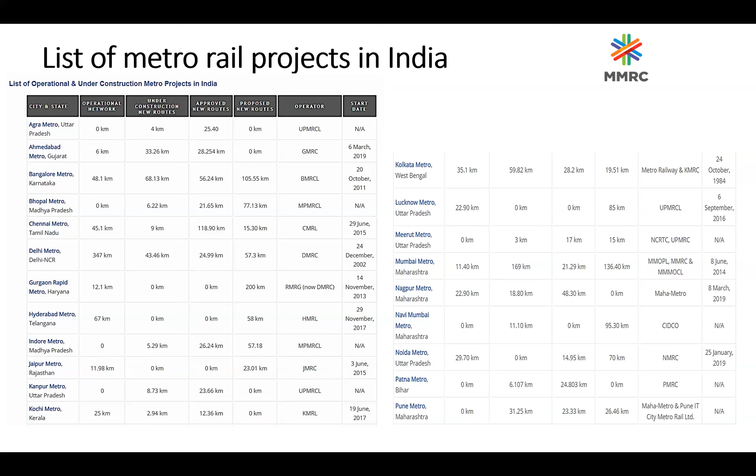These are some of the other projects that are in pipeline: Gorakhpur, Surat. In fact, the Surat Metro, the Prime Minister is inaugurating today, laying the foundation stone. Other projects that may come up, may not come up, in what time frame they come up, but they are also on the horizon as the country is progressing.

If we see global comparisons, London has got a 400-kilometer underground network, 11 corridors, 270 stations. London Overground has 167 kilometers.

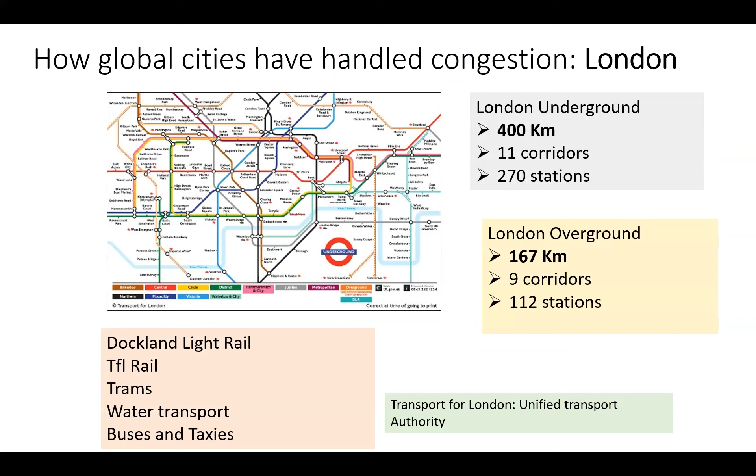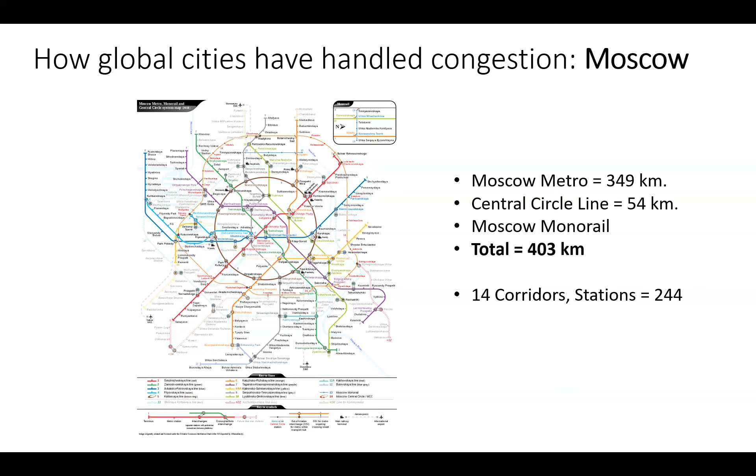We see Moscow, 403 kilometers, 244 stations. Singapore, about 200 kilometers, 119 stations. This statistics could be a little old, maybe 2-3 years old.

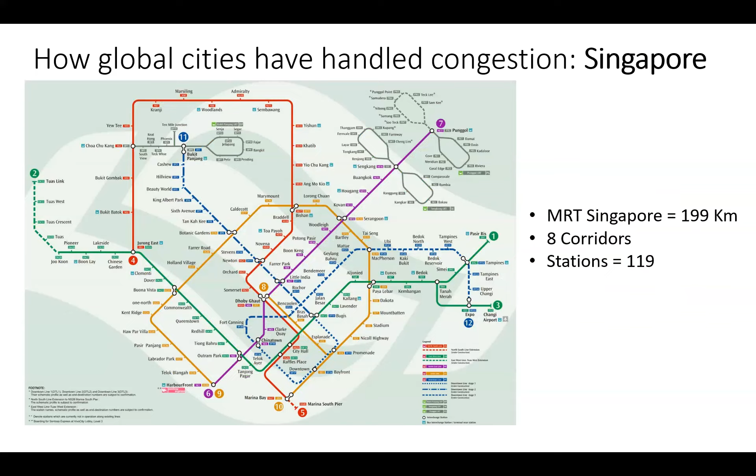And then we come to Mumbai. The Mumbai latest master plan is actually for 337 kilometers, 14 lines to be completed by 2026 with an investment of 1,40,840 crore. That's the government statistics.

Some facts about Mumbai: it's the 6th largest city in the world. It's the financial capital of India. It contributes a substantial share in India's GDP. It collects 1/3 of India's tax revenue. The ports handle 1/3 of the country's foreign trade. It handles 38% of international and 28% of domestic air traffic.

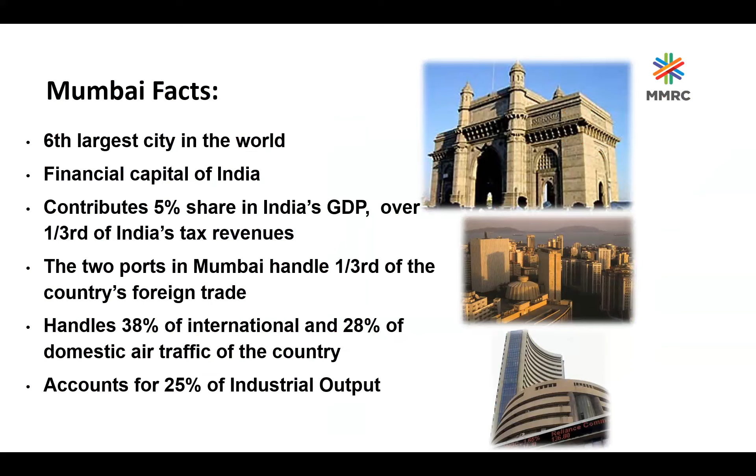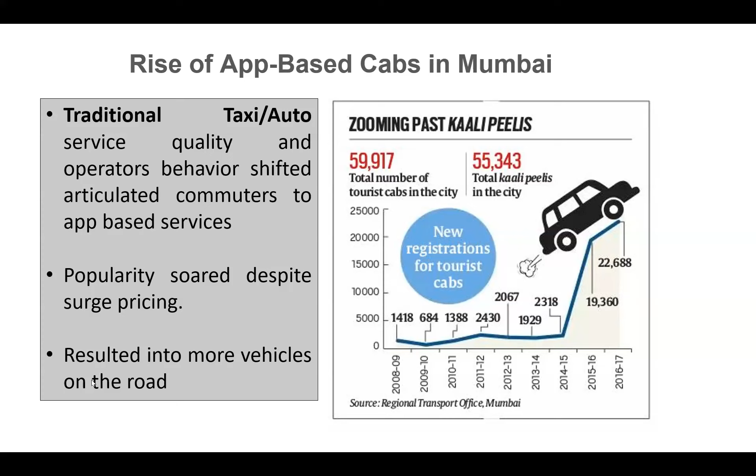That's Mumbai's suburban infrastructure. In Mumbai, huge traffic is actually carried by railway, which is now being supplemented by creating this metro network.

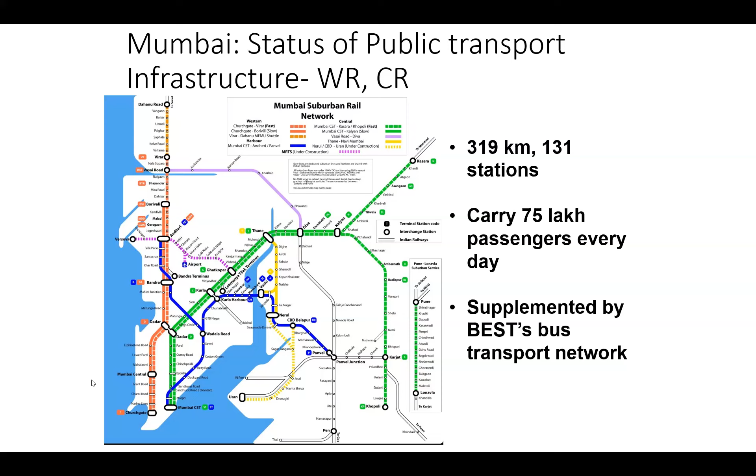Our project is 33.5 kilometers fully underground, it has got 27 stations. It cost 23,000 odd crore at the sanction level. The project cost has increased, and revised costs are under approvals.

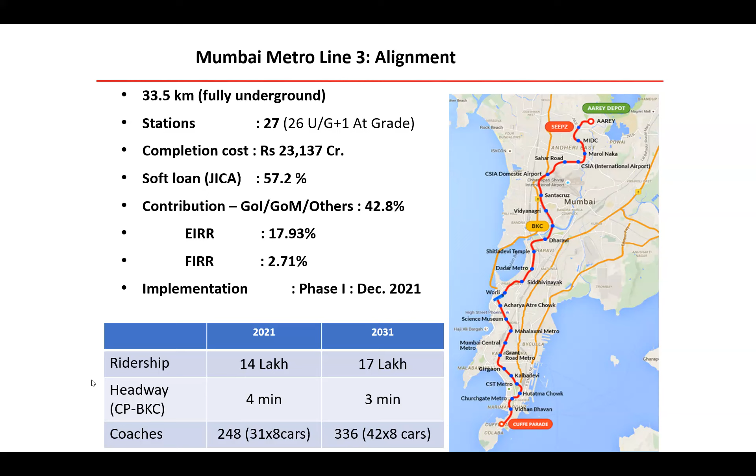Some statistics as to which area we are connecting: we are connecting the business district, public transport hubs, both airport terminals, connecting origination and destination points, educational institutes, hospitals, religious places. 30 lakh people in Mumbai are in the influence zone of this project.

The trains would have 8-car capacity and will cater to 72,000 PHPDT. On rolling stock: fully air-conditioned stations, platform screen doors, CBTC, unmanned train operation. So any unmanned network in India or abroad, we are matching with that.

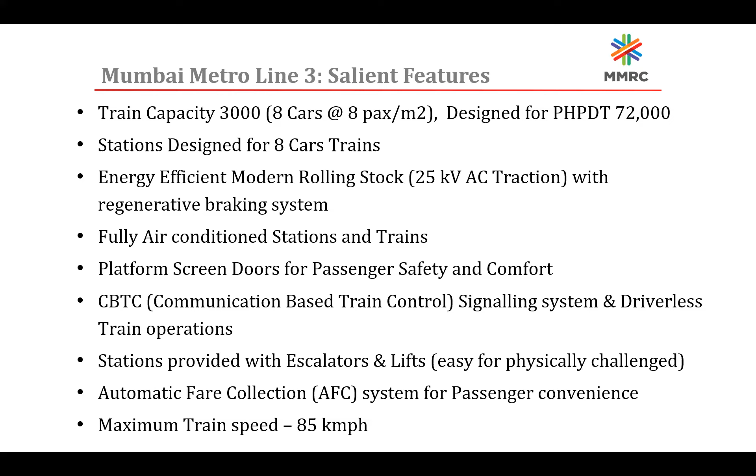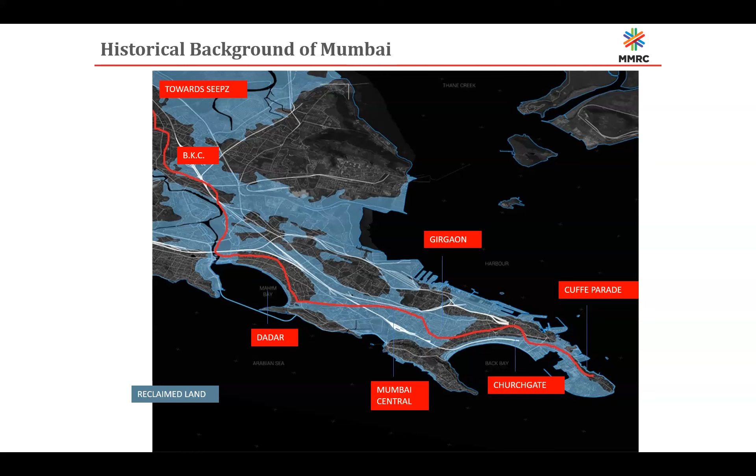Mumbai was 7 islands, and these 7 islands, over the period of time, were joined by reclamation. So the blue part that you see is the reclaimed part, and that's how our line is set up in the topography of Mumbai—somewhere very close to sea, somewhere in the reclaimed area, somewhere crossing a water body. There are challenges.

The corridor passes through densely populated and congested areas. It's practically impossible not to have tunnels passing directly underneath or in close proximity of existing buildings and infrastructure. We are in close proximity of heritage buildings, high-rise buildings, dilapidated buildings, congested areas with narrow roads, flyovers, metro viaducts, and railway lines.

What is important is that each of these challenges is analyzed and designed through modeling and calculation to ensure they are technically dealt with. This is where the professionals in the field of design come in, to model the situation, analyze it, and give data and limits which the site engineers would take into account while executing the work.

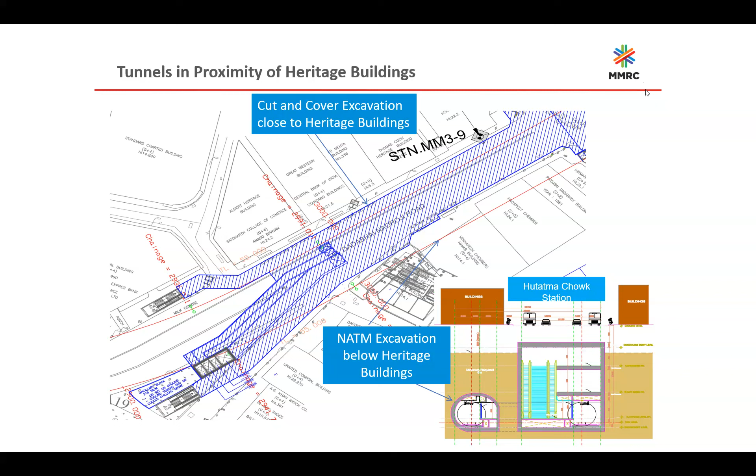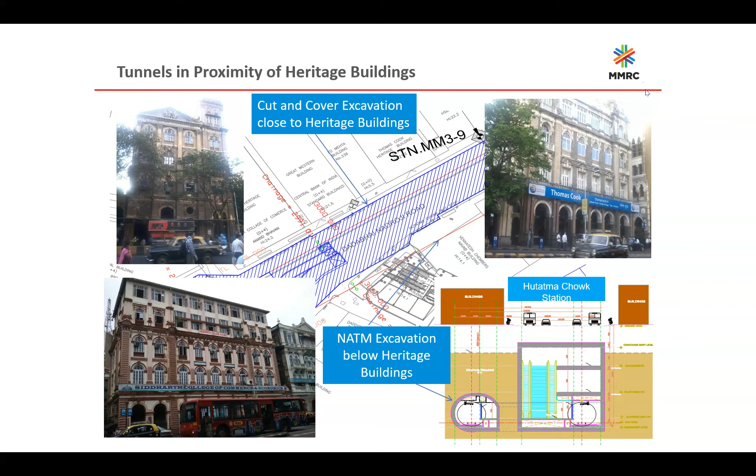Now, some typical examples: if you see the cross section of Hutatma Chowk station, we have one platform created by mining, by NATM, and one platform in a cut and cover box. There are buildings above, and these are heritage buildings. These are the type of buildings within which this project is situated.

Another station, Vidhan Bhavan station. The high-rise buildings are very close by. We also have an old area, Kalbadevi.

Let me fix some technical issues if it is from my end. Hello, am I audible? Yes, yes, you are audible, sir. You are audible, and that disturbance is very little, minor. You can continue, sir.

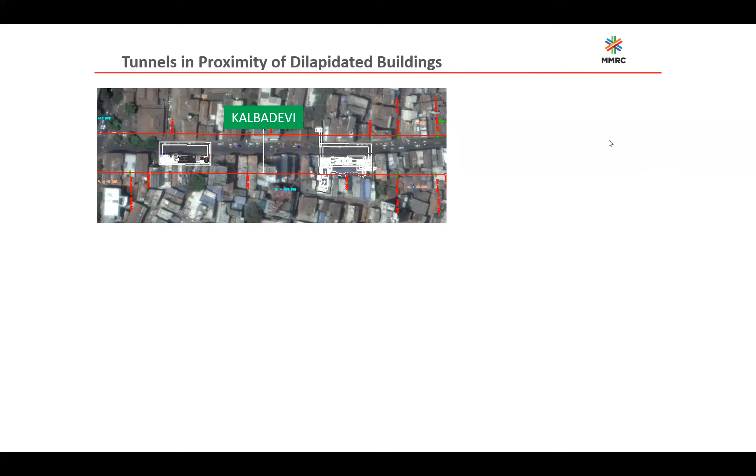This is Kalbadevi station. If you see the Google image, there are a lot of old buildings, and the white lines show the station, how it is seated in the midst of old dilapidated buildings on both sides of a narrow, 10-meter wide road. We are creating a station there, and we have already done the tunneling beneath these buildings.

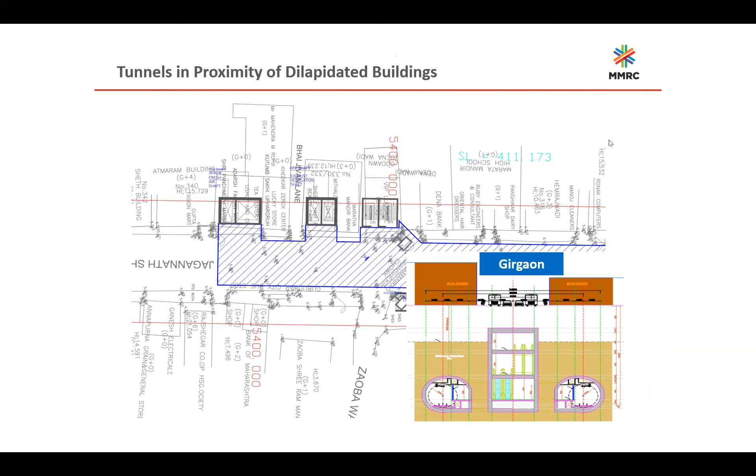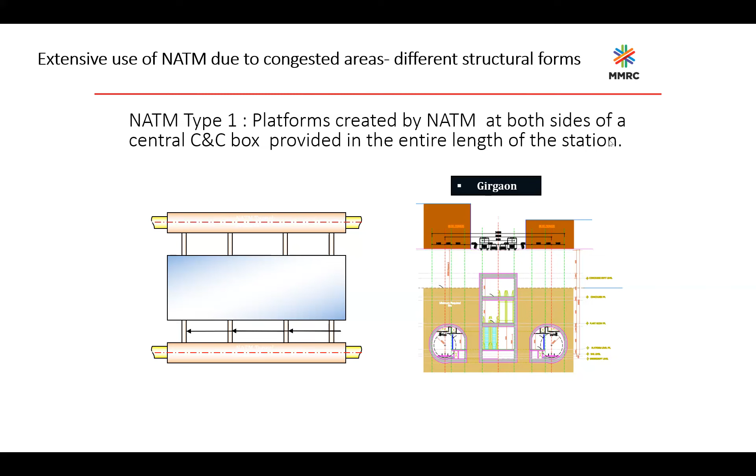Another station next to Kalbadevi station is Girgaon. Both platforms are below the buildings and being created by NATM technology. These are the buildings in that area. In all, 7 stations are done with cut and cover and NATM technology.

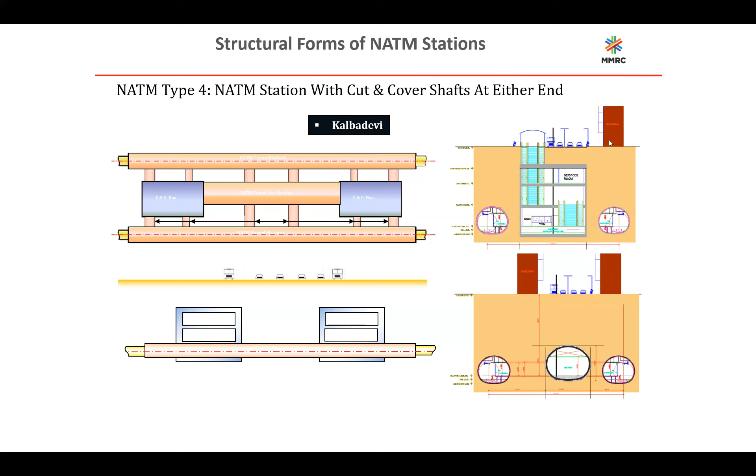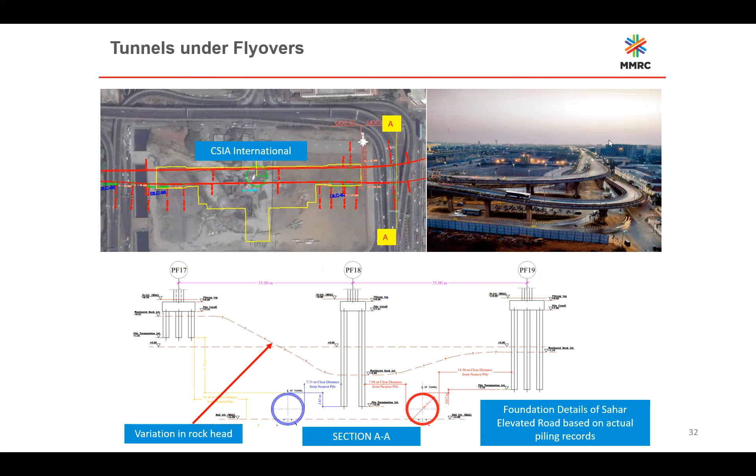In Kalbadevi station, in fact, the central cavern is also a tunnel. Then we are below flyovers, so you can see the foundation of the flyover, and we are on either side of it. Below buildings, we are directly beneath the foundations of high-rise buildings. This is Marol station, where the station is on either side of a metro viaduct. We are also crossing a railway line.

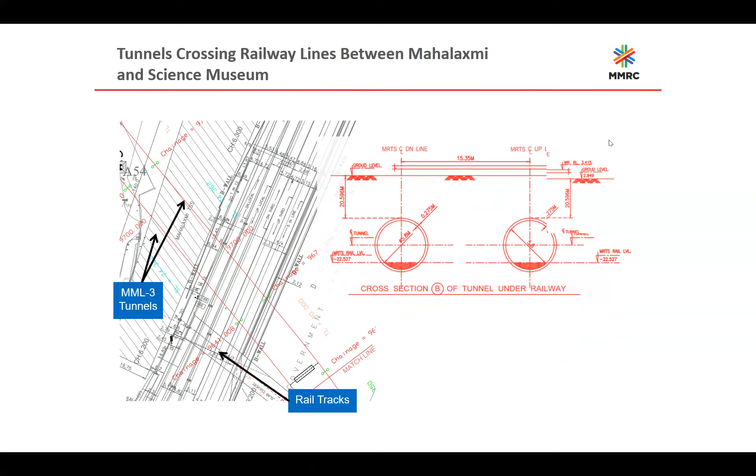So these are the challenges faced by the project, which ultimately come to the designers. While field engineers deal with these challenges, finally the designers have to model and design their structures. They have to give study solutions and study construction techniques.

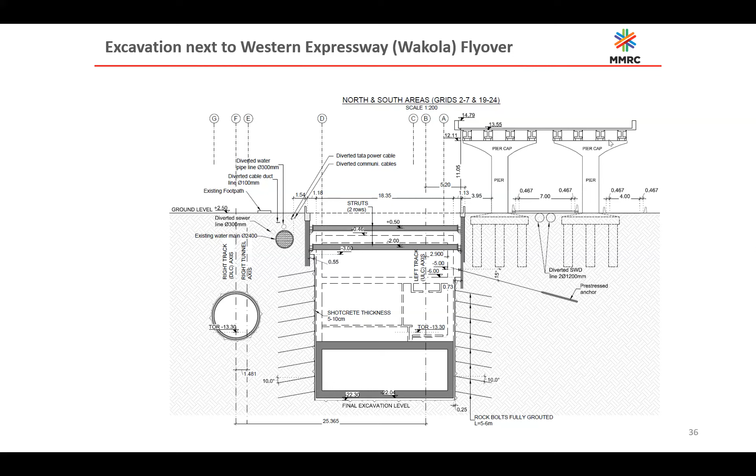Now, coming to the technology used in our project, I would say three types. One is the tunnel boring machine. Here the tunnel boring machine does the tunneling.

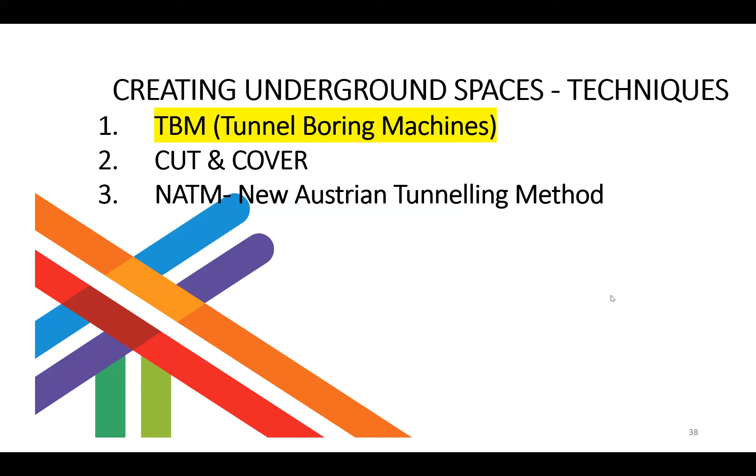Sir, your voice is missing for a while, just for the half minute, from the last half minute. Is it okay now? Yes, it is okay. It's okay, sir.

Okay, so I was explaining principles of the tunnel boring machine. It's one of the major components of the project, and in any urban tunneling, tunnel boring machines play a vital role. We are doing something like 55 kilometers of tunnel by tunnel boring machines in Mumbai.

Primarily, four bullet points: one is the design part, the survey part. Second is the physical part of launching the shaft. Third is the mechanical part, which is the tunnel boring machine itself. And the fourth is the segments and track - the segments that we erect to create the support system.

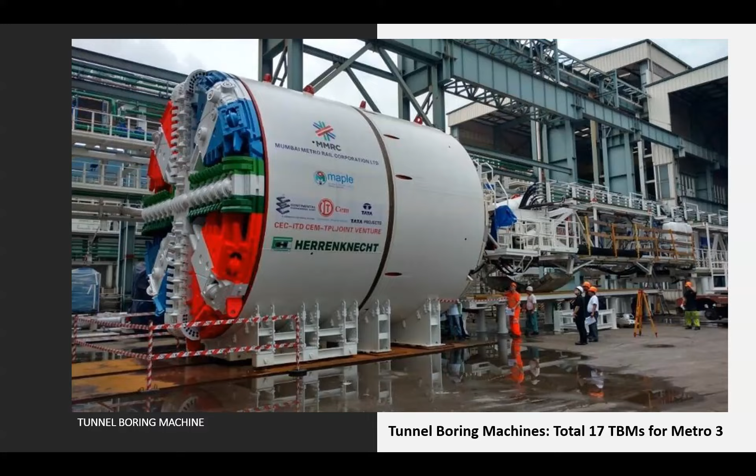This is typically a tunnel boring machine, and I can show you a model of it actually. Can you see the model? Yes, sir, we can see. So a tunnel boring machine primarily has a cutter in the front.

In a confined area, it goes a confined length of about 10-12 meters, within which all major operations take place. In this portion, the ground remains supported and the segments are erected within this area. Before the shield moves out, these segments are grouted at the tail end. So the unsupported part of the ground is there for a very limited time.

As I was asked, how do we deal with the basalt rock in the tunneling? Extensive geotech survey is done in the beginning. We have 7 contracts dealing with tunnel boring machines. Geology in all 7 contract packages, while being in basalt range, varies a bit here and there. There are weak pockets, there are very strong pockets.

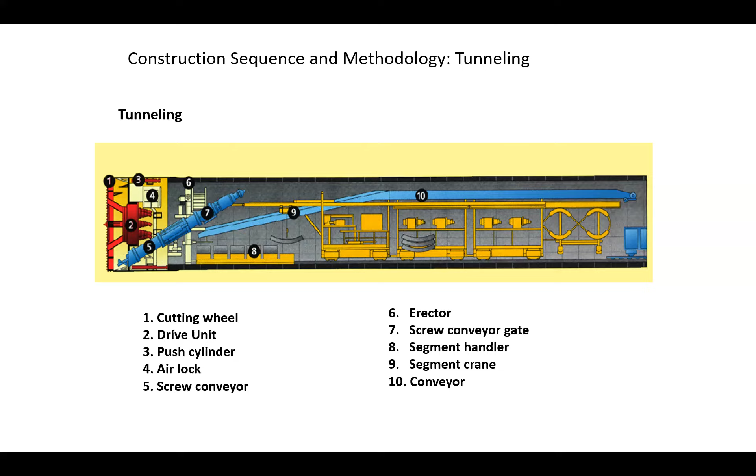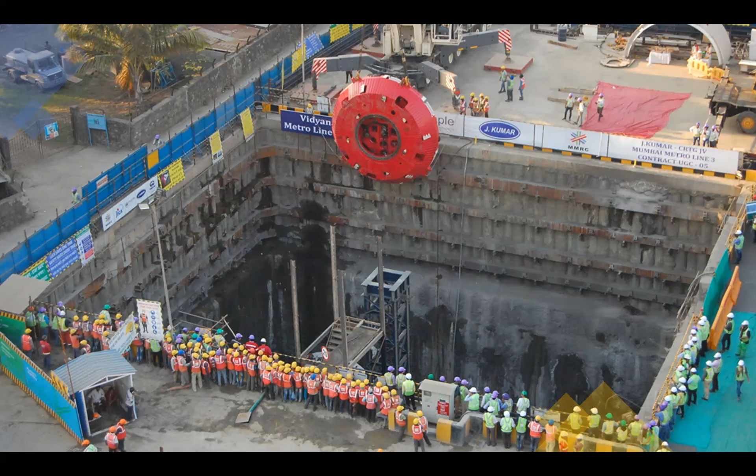This is the second element of shaft. These are vertical cuts from where the machine is lowered into the belly of the ground, and then it starts moving horizontal, or on its alignment. A shaft could be rectangular. If it is at the end of a station, it could be circular, depending upon the topography of a certain area.

The machine is assembled in pieces because it's heavy, around 700 ton in total. Even the cutter head, the piece being lowered at this moment, is about 90 to 100 ton. The machine in total, including all its attachment gantries, is about 100 odd meters long.

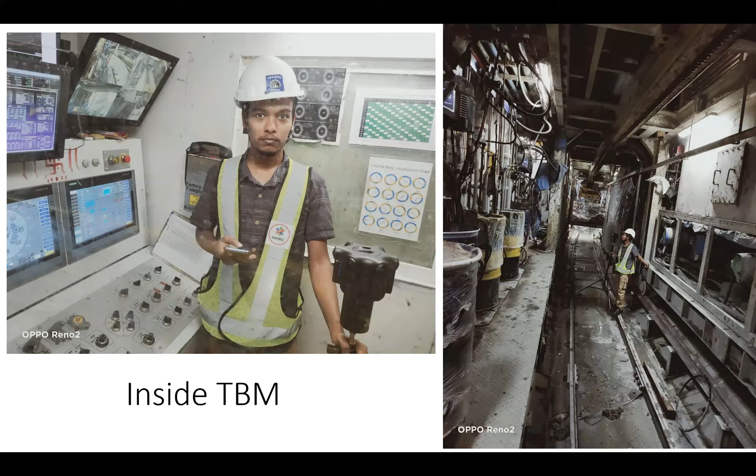There is a control room from where all horizontal, vertical, lateral movements are controlled. The machine is controlled from this control room. A typical metro network would have 2 tunnels running parallel and a station in between.

To start with, when the machine is given a bulkhead or a stay from where it takes reaction. Once it is in ground, it takes reaction from the segments which are already erected.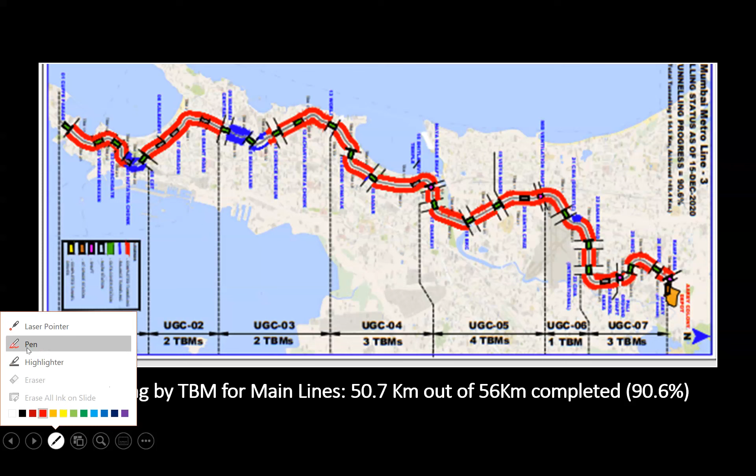That's the Mumbai project. We have done 90% of the tunneling, and all these red marks that you see are the portions that we have completed. Some small portions are pending, basically in this area. Let me show you - some portion over here which is pending, some small portion here, or some portion over here, some bits and pieces.

Now another technology that we have used is cut and cover. Looks simple, but when you do that a meter away from buildings, and old heritage buildings at that, it becomes complicated. Most important is how to control settlement, how to control loss of ground, how to ensure that there is no movement in the ground and no movement in the building.

Those buildings need to be analyzed to see to what extent they can be subjected to some movements, and then we set up monitoring systems, control systems, and alarm systems so that we always remain safe. People are living in those buildings.

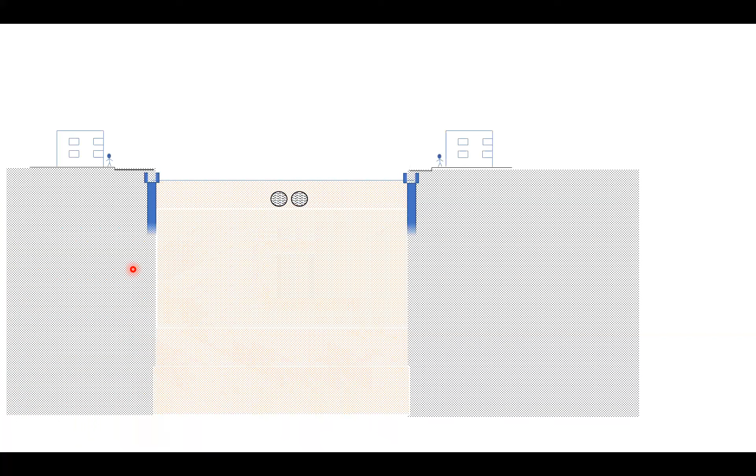On execution level, there would be a perimeter wall. We are doing secant piles. In Delhi, they normally do diaphragm wall. There are utilities, so you can see utilities. We have to deal with utilities also.

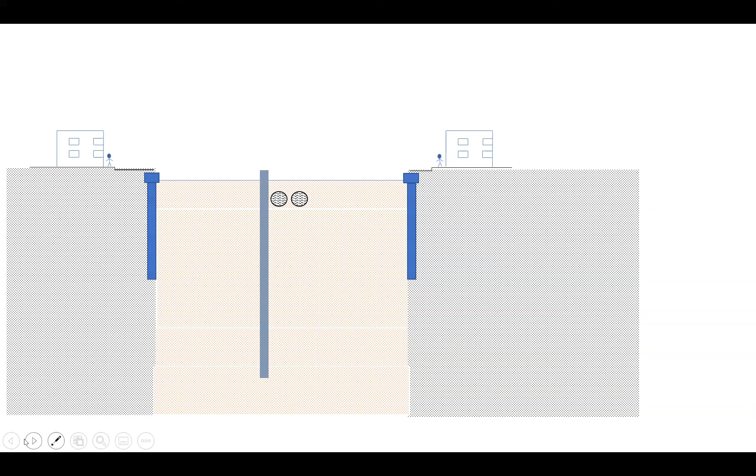Then there could be a plunge column or intermediate support. We have to take care of traffic, so there could be a traffic deck. In most of the area, we had to bring the traffic back on the top. These are all steel structures, so partly the space is given to traffic, partly space is occupied for our own construction related activities.

And then we keep moving down, excavating in soil or rock. The top part is soil, 4, 5, 6, 7 meters. Below is rock. And we keep putting struts to ensure that there is very small movement in the ground outside. If this ground remains unaffected by excavation over here, these buildings are safe.

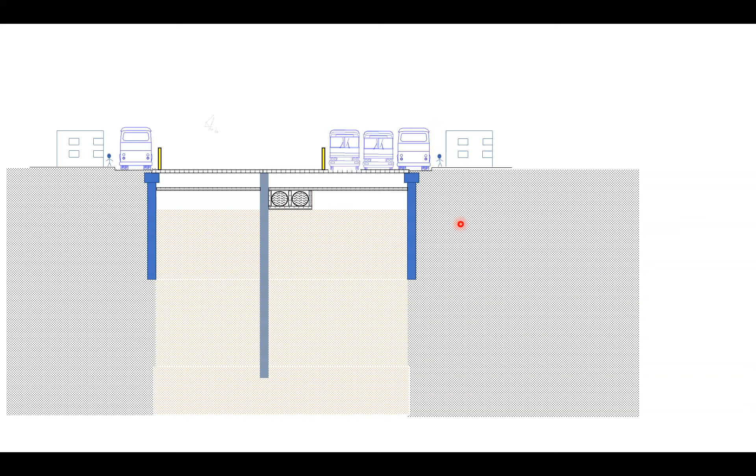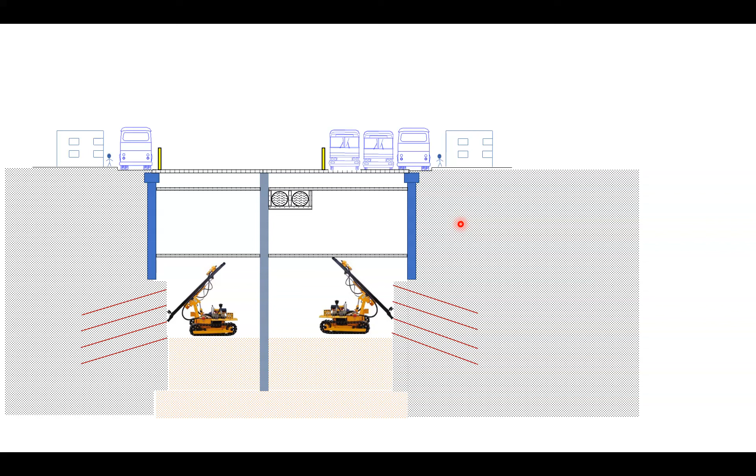So different stages of construction, we keep moving down, and somewhere we move into the rock area, then it becomes unsupported. Once we are in rock, we have to ensure integrity of the rock. Maybe we have to do a lot of rock anchoring, shotcreting.

We have to ensure preventing ground loss, which is a very primary requirement. Controlling vibration also becomes important. In creating this space, rock excavation, if we are using blasting, that vibration can create problem for these buildings. So controlling that vibration during blasting to such extent that these buildings, some of which are heritage, some of which are weak, remain safe.

So we employ those experts, agencies who design blasting. And finally, we build the station.

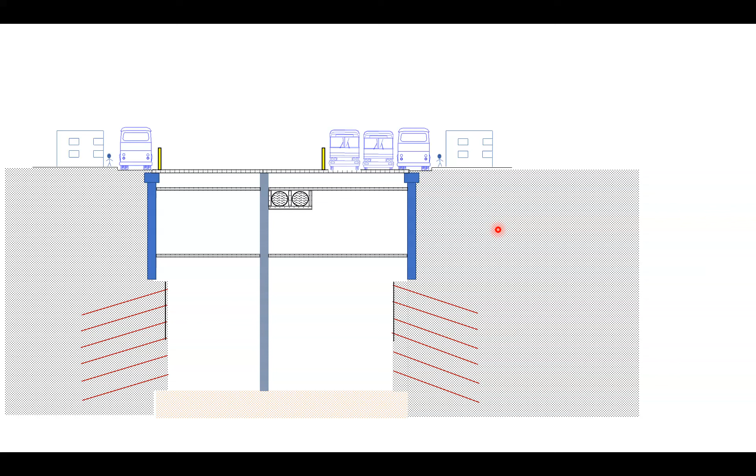In fact, in underground construction, because of the uncertainties, it is the temporary works which I feel is the most critical and which warrants a very high level of professionalism from the designer. They have to anticipate so many situations in their understanding for which there is no direct data.

A building per se, this building comes in the last, which can be constructed base slab first, then wall, then a slab over here, then wall, and then a slab here. This is a relatively simpler work.

The most difficult work is the temporary works. To divert utility, to create space for yourself, to create space for traffic, create this peripheral confinement, and to hold this temporary works in such a way that buildings are not put to risk.

And that's why the secant pile design philosophy becomes very important. I'm not a designer, but these are common sense points which I can flag. The detailed designing would be known to designer and professional designers.

Secant piles are provided to hold excavated face. The stresses in secant piles are primarily determined by the bending moment. Axial forces are negligible. Bending moments are dependent on different stages of construction.

Secant pile and support systems like strut, waler, anchors are designed for one adjoining member failure. So this is one important point. In our project, we are using British code, which makes it mandatory to account for one strut failure. So just in case, if we are lifting earth, we are lifting rock, and if that crane fails, if it damages one strut, then that failure of one strut should not affect the whole confinement, whole support system. So we design it for one strut failure.

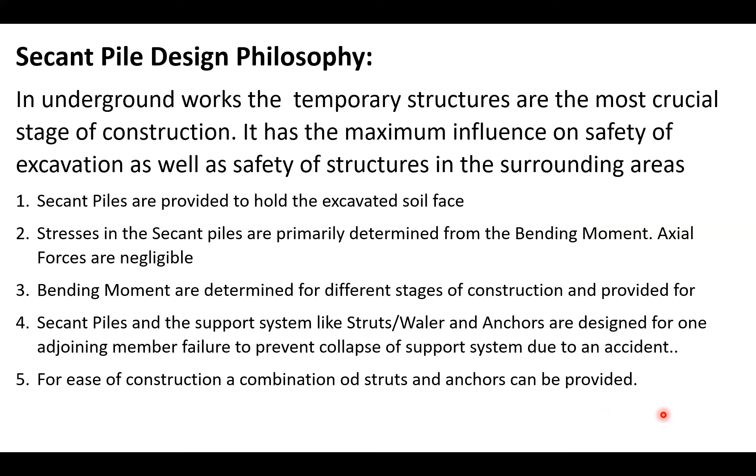And finally, the project would have certain specifications. These things are meeting those specifications. So a very close coordination between the contractor and the designer to meet these specifications is important.

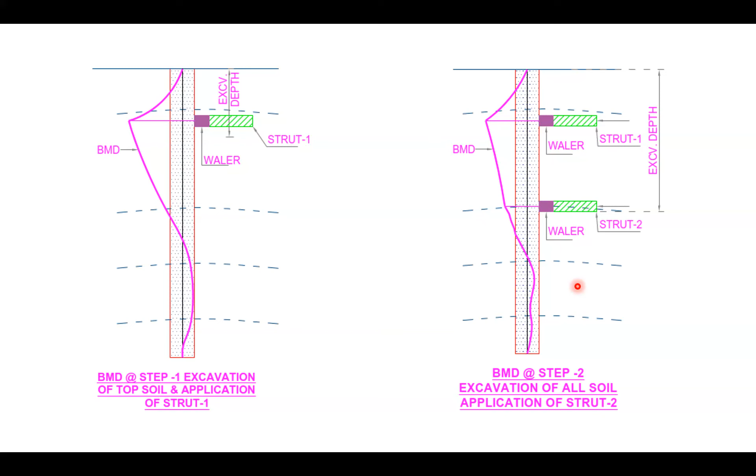So somewhere the rock anchor would come in picture because he has to hold the toe of this, because we have a little margin over here. The toe should not be allowed to move.

And all the faculty who is present here can visualize what important role they play into what we execute on ground.

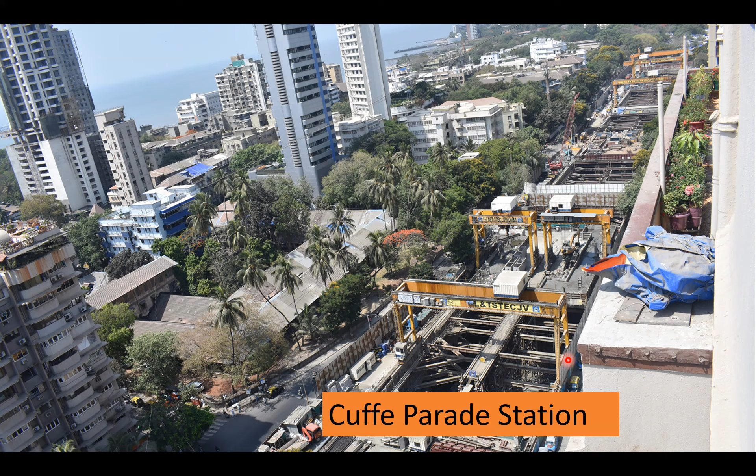Now I have some construction photographs. We have a Cuffe Parade station, which is in the midst of the building, and Vidhan Bhavan station.

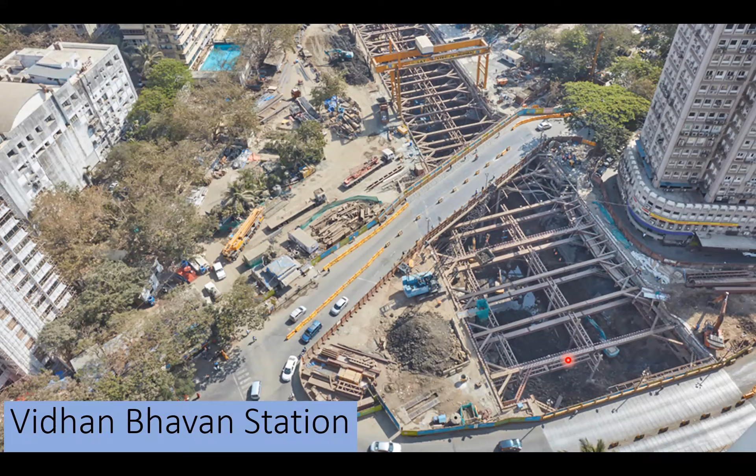Even though there is no formal design available for these buildings, we have to model them, analyze them for the construction effect that would come on them, and then set parameters for their monitoring. Monitoring is our backbone, another technical part that is done, and we monitor these buildings 24/7 online.

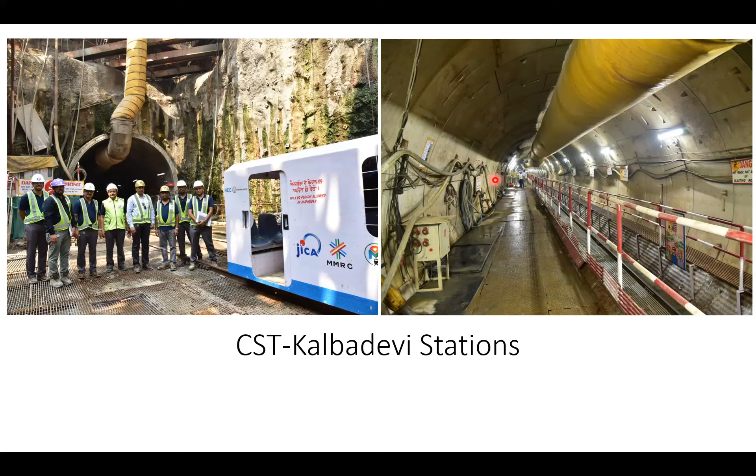Another station, Kalbadevi, and Grant Road, where you can always see the building just next. This is the 2-3 easy station we have, Science Museum, where there is no building.

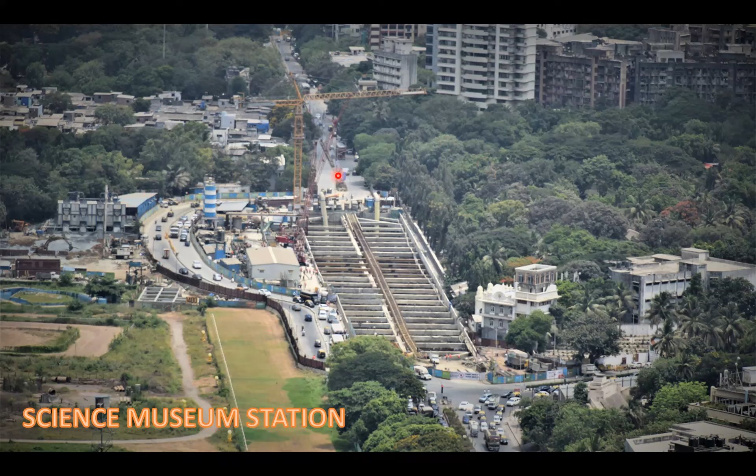We had to divert the whole traffic sideways and created a space, a rare opportunity for us. That's from inside.

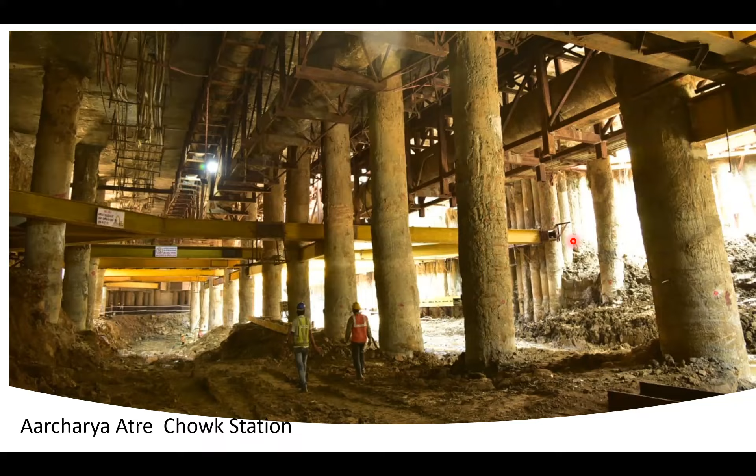That's another station, Acharya Atre, from beneath. Then Dadar, Siddhivinayak, BKC, and Vidyanagari — that's the drawing I was showing.

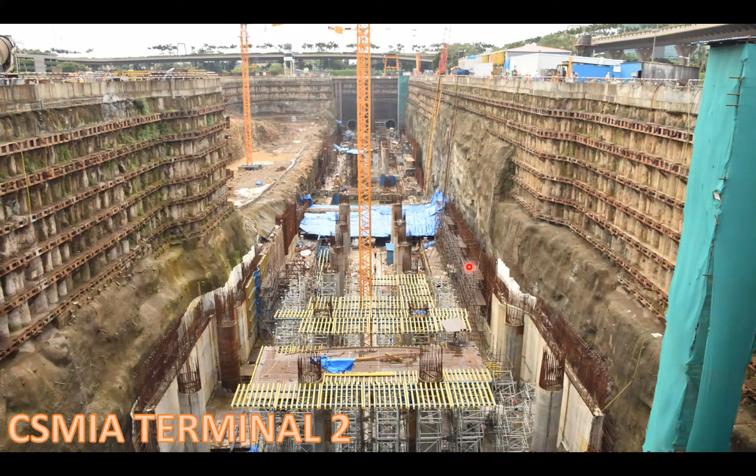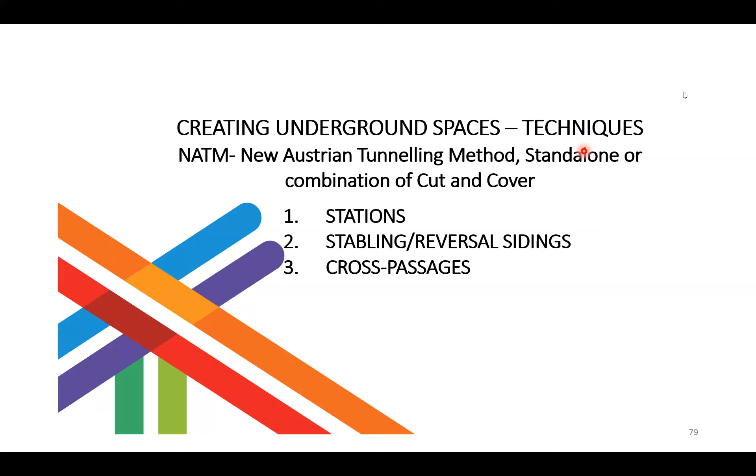We can't take the TBM back out of the same passage, except in rare cases, where it has to be dismantled, cut into pieces, and taken out.

So as the name suggests, NATM is the New Austrian Tunneling Method. It's a sequential excavation method, evolved in Austria, and it deals with the most difficult forms of tunnel construction. It can involve very small pockets that we create and support.

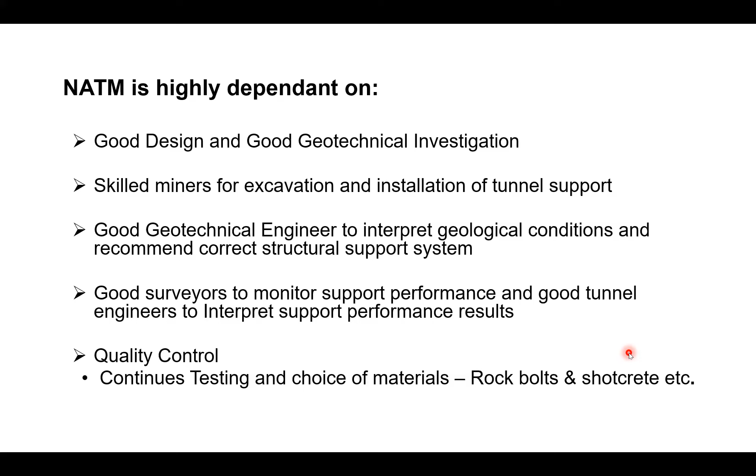It's highly dependent on good design and good geotechnical investigation. It needs skilled foremen, skilled miners, skilled engineers for excavation and installation of tunnel support, and a good geotechnical engineer, because it's like a design as you go. Every time the geological conditions are studied, the support system is conditioned or customized for that purpose, followed by quality control, survey, and all these.

Unlike a tunnel boring machine, where the tunnel support is universal along the tunnel length and designed for the worst case geological condition along the alignment, NATM utilizes a support system that is wholly dependent on the rock condition at that particular point of excavation.

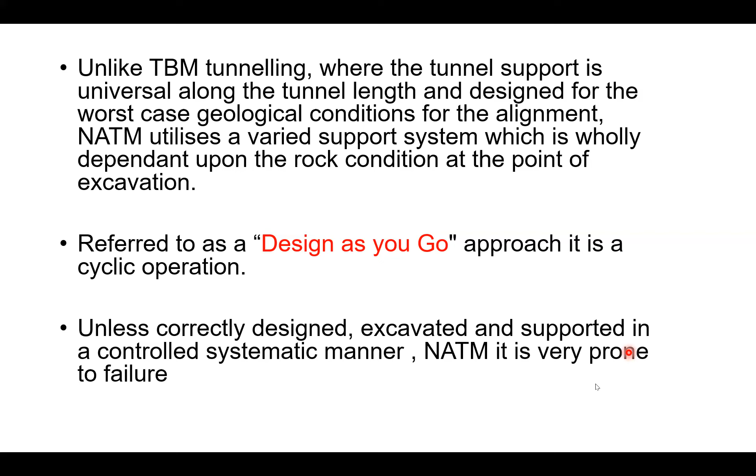Urban situations leave a very small margin for engineers to afford an error. Unlike greenfield conditions, brownfield conditions give us very little margin of settlement, very little margin of failure. So unless correctly designed, excavated and supported in a controlled systematic manner, NATM is very prone to failure. Hence the need for good designers and good engineers.

These are the stages in NATM design and construction. One is geotechnical investigation, another is modeling, and there are computer models available for analyzing. Output of these models provides assessment of ground behavior. This modeling is performed at various locations along the tunnel alignment, particularly at each change of geological profile. Accuracy of output is highly dependent upon the data obtained from geotechnical investigation. For all designers, please remember: in all computer aided design, garbage in leads to garbage out.

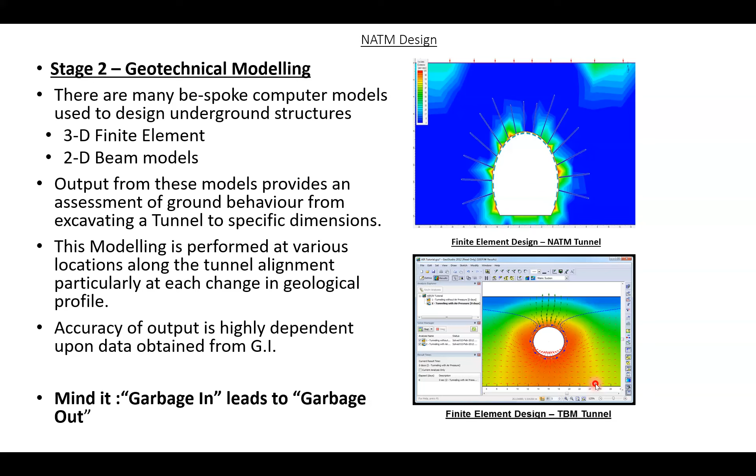That's a risk engineers these days have to be very mindful of. Then there's the development of construction methods. The contractor chooses a construction method, sequence of excavation, and a structural support system, and the designer builds these inputs into his design. So these are two complementing, supplementing analyses that go on between the contractor and his designer.

It consists of a cyclic process: pre-support, particularly in poor rock conditions like class 4 and class 5, then excavation, then muck out, then geotechnical appraisal, confirmation of structural support type, shoring, sealing, installation of the structural support, and then repeat. Go back to pre-support, excavation, mucking, geotechnical appraisal, install support, and repeat the pre-support. This cycle goes on and is continuously monitored through survey instruments.

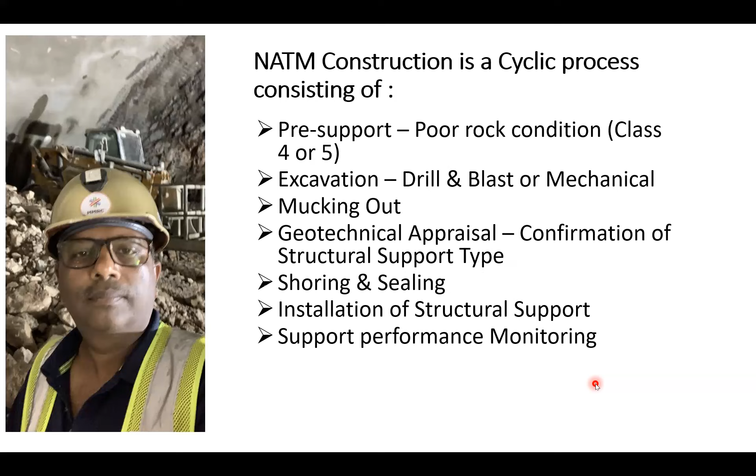I would go through these stages in a pictorial form and show the type of material that is used. I would not go into design detail, but please note all these stages are backed up by a design. Design is very important. The designer tells us to what extent you can move in one stage, what limiting deformation can happen. The designer would tell us about this fore-poling, what diameter, what spacing, what length. This shotcrete you see, the designer would tell us what thickness. So all this construction activity on ground is supported by a design. That design will also give the deformation levels, and that's how it's continuously verified whether the design is meeting the ground condition or needs modification.

The pre-support is like putting a fan-shaped structure on the roof, like this. If the ground is weak, this goes much beyond into the ground, creates an umbrella above, and then we safely excavate beneath. That's the concept.

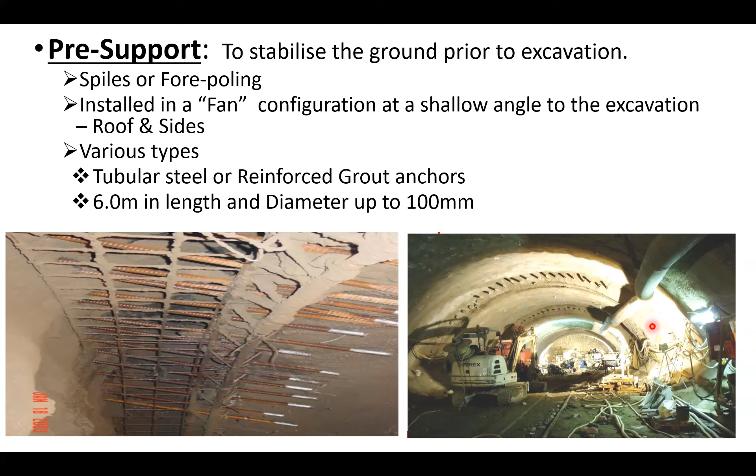Then we do the excavation. The excavation could be by drill and blast, by mechanical equipment like a road header or impact breaker, or it could be hand excavation if the rock or soil conditions permit. This is primarily dependent on the rock or soil property, the tunnel geometry, and also the availability of resources. Something that's possible in Mumbai may not be possible in the Himalaya.

This one shows the pattern for controlled blasting, and that's the excavation sequencing. It could be full face excavation. In stage one, we excavate the heading; in the second phase, we excavate the benching, but it's still full face excavation.

Another method is stage excavation. Here, we excavate somewhere, creating support, then moving downwards, leaving some portion, and so on. The designer would assess the ground condition, give a design, and the whole face would be excavated into multiple small fragments and continuously supported.

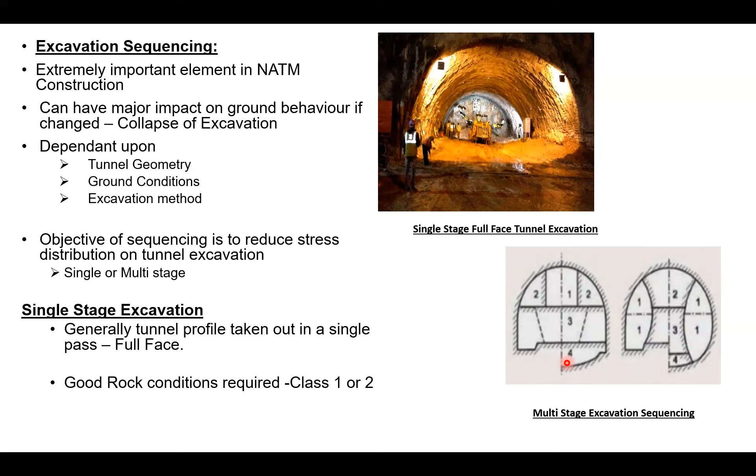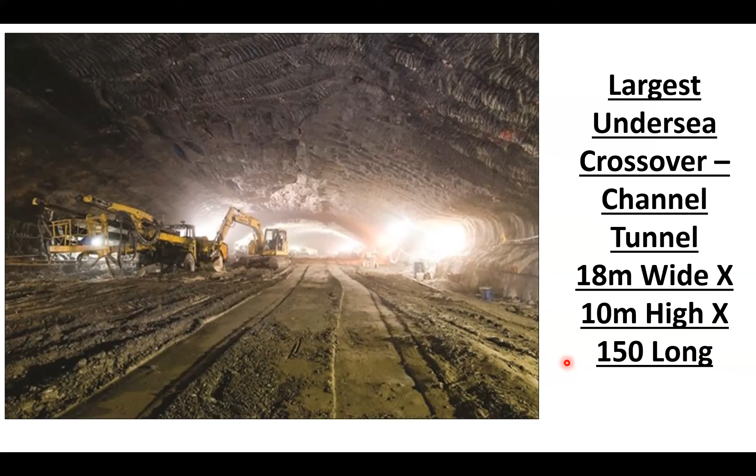That's a large undersea crossover cavern in the Channel Tunnel. I will show you some photographs. Something similar we are doing in Mumbai. We may not be below the sea, but something similar we are doing in Mumbai. I'll have those photographs coming a little later.

Then the rock bolts. The rock bolt as a concept works like this: we have fragmented rock, and these rock pieces need to be kept in position. So the rock bolts are drilled and tied into the ground, transferring the load from the unstable exterior to the confined and much stronger interior of the rock. It could be mechanical or a grout type, installed in a predefined pattern. At the same time, the engineer on ground would also take his call and provide extra rock bolts wherever he finds a weaker situation.

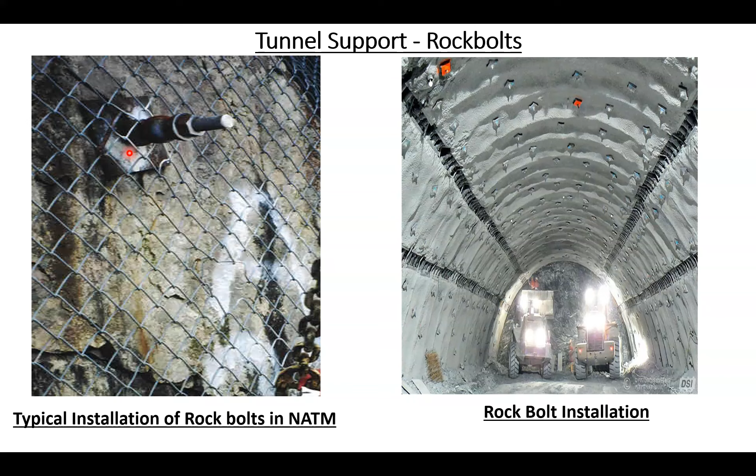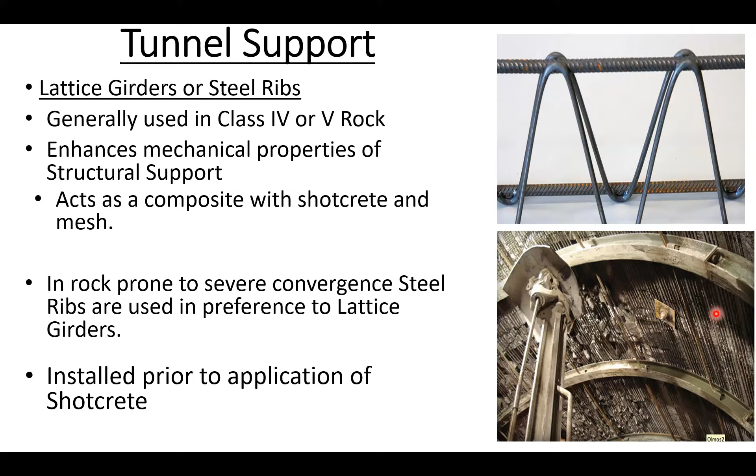So it looks like this. All those budding designers, once they see how the structure finally looks like, I'm sure you will be able to envisage what type of forces are coming, what type of requirements are there from the designer for meeting these ground situations.

So after the heading, we do the benching, that is invert construction, the bottom part, and then start building up the tunnel from the bottom. Whatever we were seeing was basically temporary works, at least in a metro construction. We always line our tunnels with a permanent lining.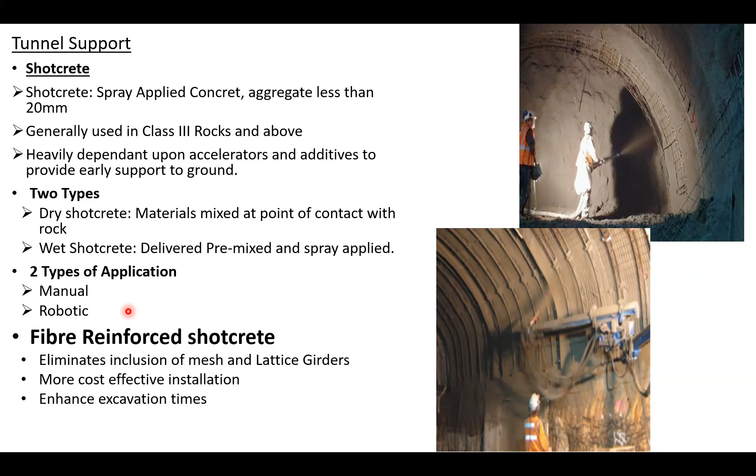As regards shotcrete, it's basically spray applied concrete. So the concrete is applied on the face of the rock or on the face of the surface. It could be dry shotcrete or wet shotcrete. It could be applied manually or by a robotic arm. It may have fiber reinforcement. All these things are governed by the design and the likely deformations.

These are the fibers. It could be steel fiber, or it could be polypropylene fibers.

So I will show you a few photographs from construction methodology of NATM station, from a station which has both the components, cut and cover and NATM. I'm showing you photographs from Shitladevi station.

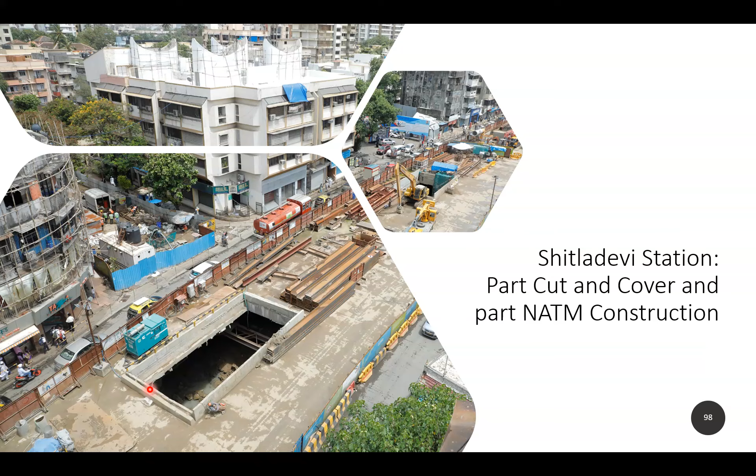And we had a situation of a ground loss. At this location, we had water gushing in from the secant pile from this face, and probably this building had some settlement, and we had to evacuate. So if failure in any ground situation in an underground work can lead to a large risk, we had the opportunity to evacuate them and put them in hotels, and then we restored that building.

So this is the typical cross section of this station, which has got a box where a lot of vertical movement would take place, and a portion which is a widened tunnel. This tunnel was done by the TBM and is being widened by NATM to create a platform. This portion is below buildings.

That's why our first preference would be to provide a cut and cover structure to make a station if we have the opportunity. But the civil engineers may not choose their surroundings, they are not in a position to choose the geology. They have to customize their solution for the ground situation that they have to provide a solution in.

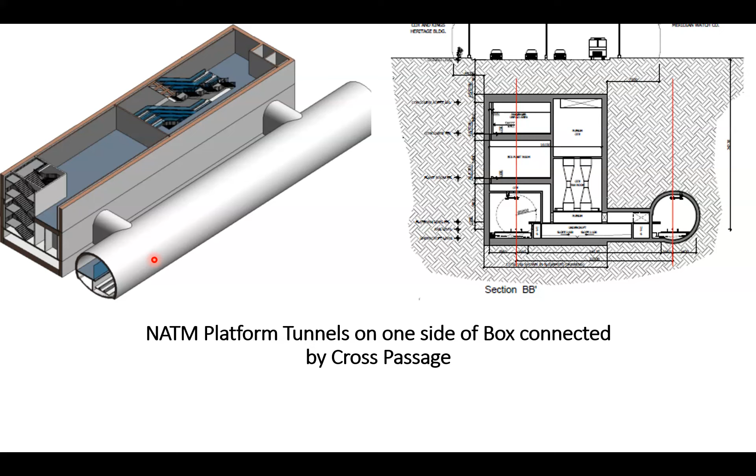So we have buildings, we have a road, we did secant pile, same as in the other case. A plunge column will take care of the traffic requirements, traffic deck. Here, this part is done in RCC. So we have an RCC deck. We chose RCC deck to ensure that these ground conditions, which are weak and sandy, are handled, as steel could probably still be flexible.

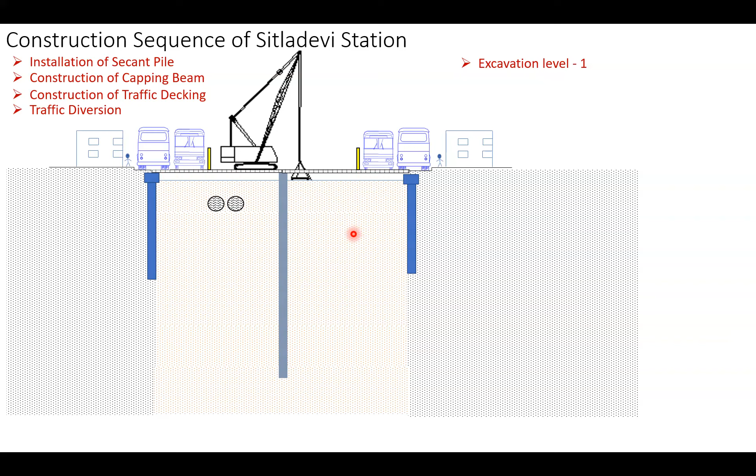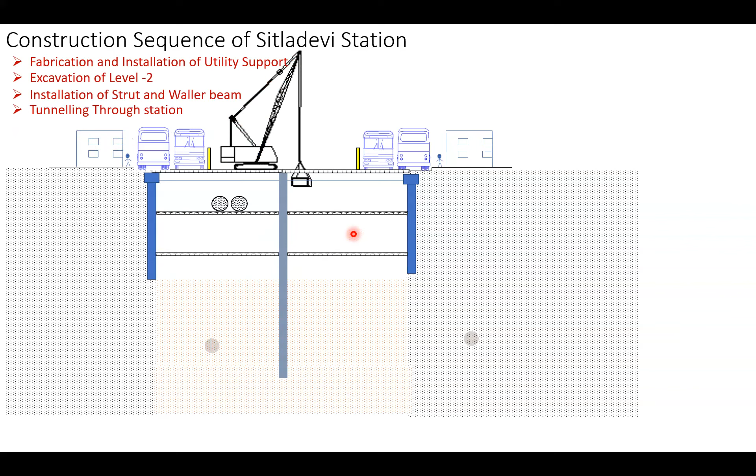So we provided a concrete deck, a thick concrete deck, which will be dismantled at a later date, and then lowering down and providing a support system, a steel support system, excavating further, and then having two tunnels passing through over here and over here, and then excavating through these positions like we showed earlier.

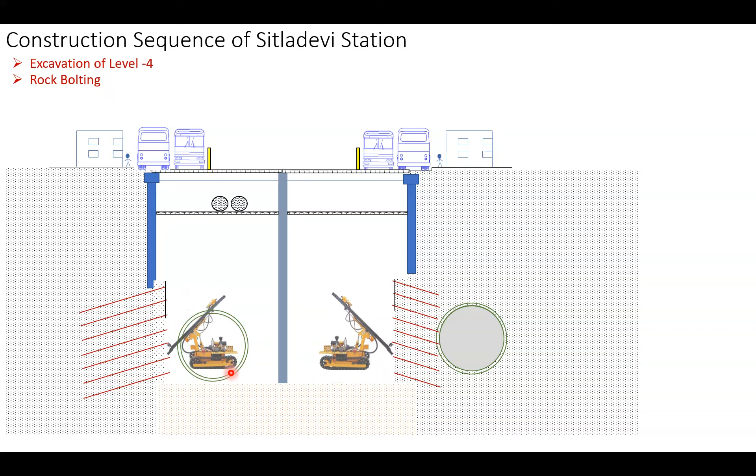So this tunnel is dismantled at this stage. And then that's how we access this tunnel horizontally from the station face and start widening and then move longitudinally, and then build up the station.

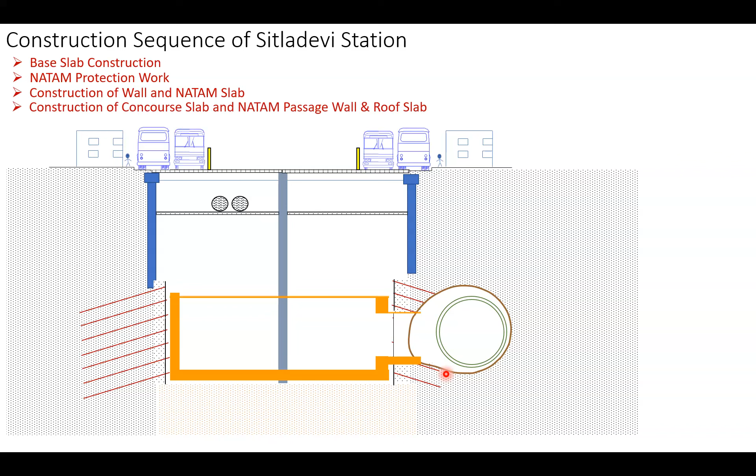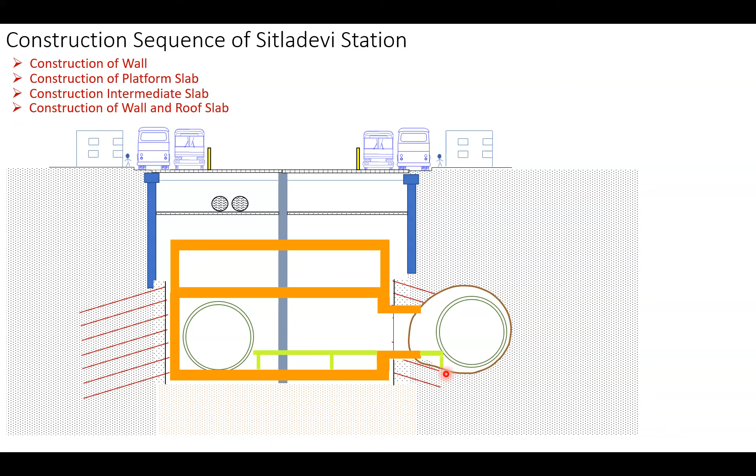So that's the station. And that was the construction methodology in a sample.

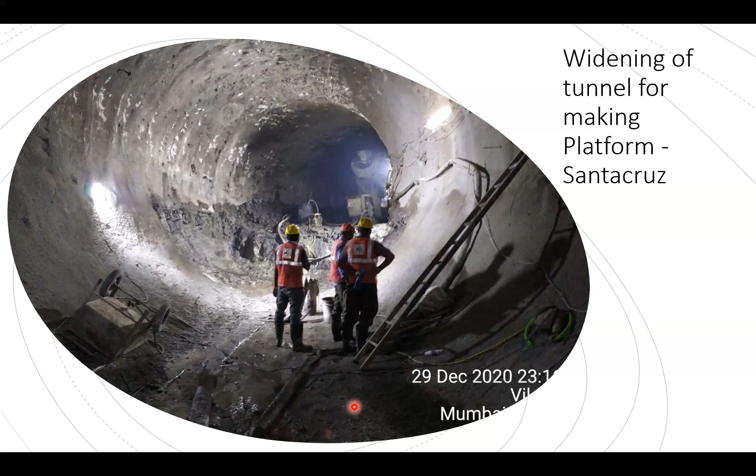That's a station widening going on. That is Santacruz. So we are widening the tunnel to create a platform.

Hello. Am I audible? You are audible, sir, very clearly. Things are going fine, very fine.

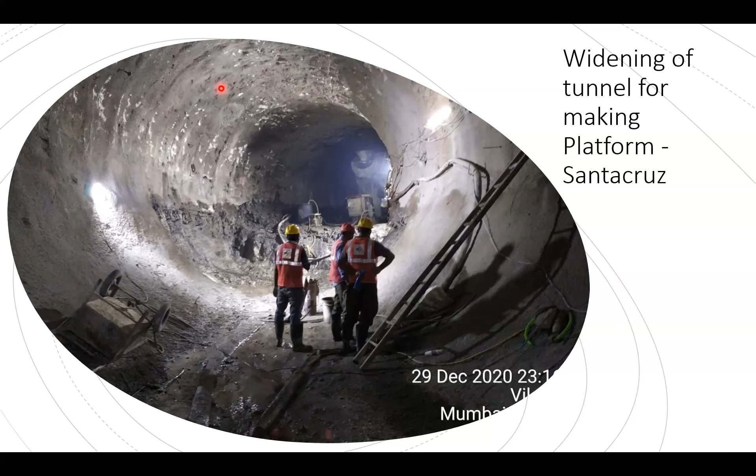So thank you for your kind attention. Safe tunneling. So that is as regards to my presentation.

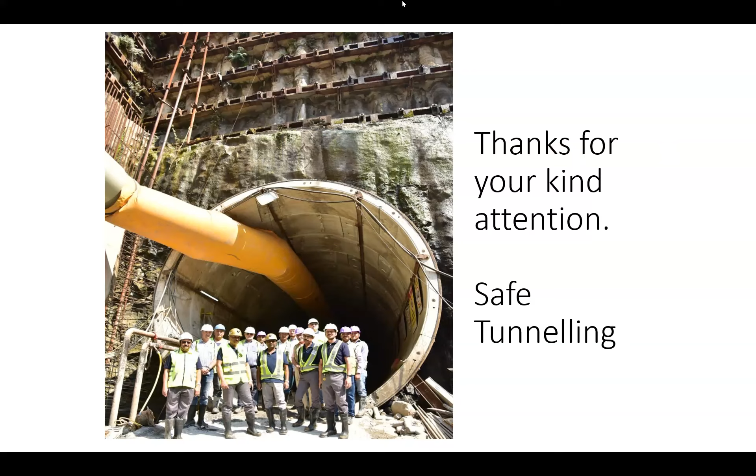I have a question, sir, if you can permit me. Yes, yes, please, but one caveat - I'm not a designer, so I would have limited knowledge of design. I know basics because I am a user. Just there was a question that what problem have you faced when you have gone through the reclaimed land?

So we have situations of reclamation which vary from 3-4 meters to 9 meters. In such situations, the top part creates problems. This reclamation is quite old, so that is one relief we have, but the soil conditions are really inferior in the reclamation part, and the secant pile in that area and the support system level was much heavier. So we had multi-level horizontal support systems to ensure ground confinement was taken care of. Luckily, the tunnel in the entire reach is in the parent ground, in rocky condition, whether fractured rock or homogeneous rock, but primarily in the parent ground condition. We have high ingress of water at many locations, even in tunneling, we had high ingress of water.